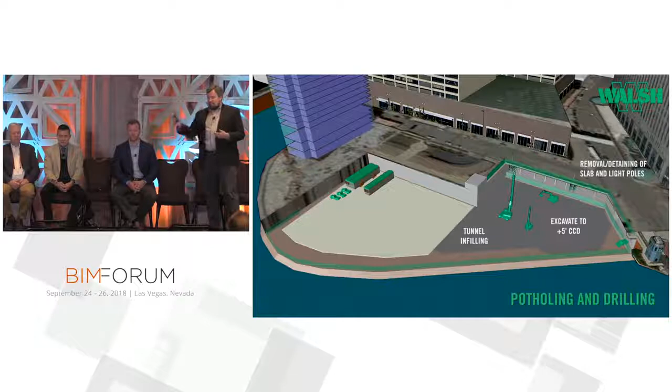The first problem we were trying to overcome was that the job site there in the gray area you see on the right, as soon as you start excavating, you've cut yourself off from the laydown area in beige on the left. So for our civil group, as they're trying to lay out the earth retention system, which because you're excavating 25 feet immediately adjacent to the full weight of the Chicago River, it's not a small feat of engineering.

But because they use bridges to build other bridges all the time, they said, don't worry about it, guys. We'll just bridge the excavation with this trestle bridge. We've got one of them in the yard right now. We can float it on a barge from the Chicago River, get to you at the end of the week if you need it. So they stepped up there.

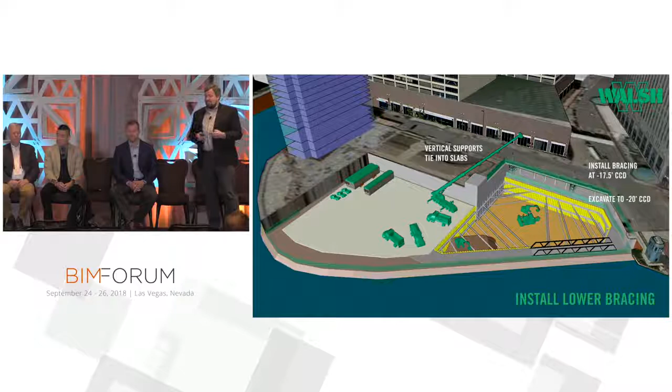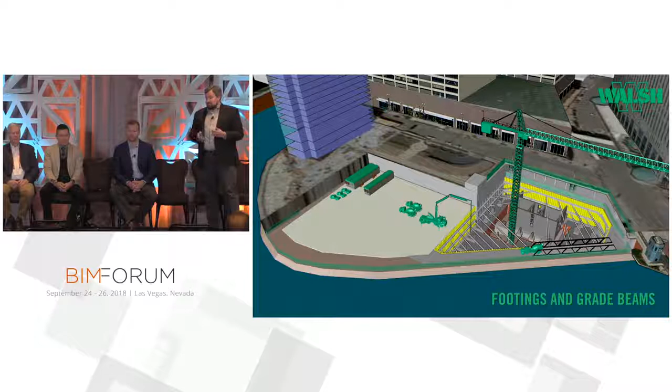Then our self-performed concrete operation came back, located the crane, identified the best place to tie into these new foundations as well, and then worked with the civil teams for plan locations for all these rakers, where they're going through the core and where they absolutely couldn't, as well as elevations of the system, because as the garage gets poured up, it replaces the bracing function of the steel members.

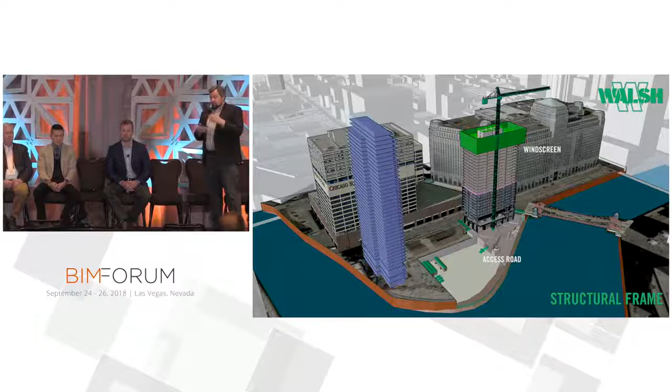And then after that, we're racing towards the sky, and this is where Dave's expertise as a project manager with high-rise comes to the fore, because he's talking to all the superintendents and project managers, putting together a master schedule and getting as much efficiency as we can out of that, because we're the high-rise group and this is what we do. And then after that point, the access to the laydown area is no longer a concern because you have a haul road going through the new garage, which will eventually serve the third parcel of land when it gets developed out, but right now it's just serving us.

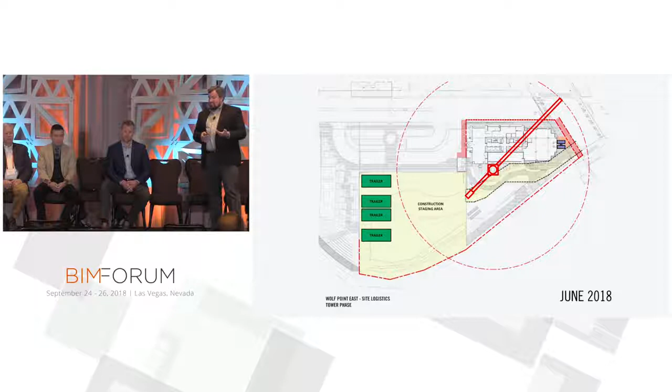So the first of the lessons learned that we were going to toss out to you was sort of a mistake we made in the project interview, where our superintendent did a wonderful job of walking everybody through those 4 slides as well as the 20 others that are part of that sequence. And then sort of as an aside, talked about, yeah, we could leave out the concrete lid and use that as a pick area for the crane. And the Hines technical experts were right there with us.

And it was a good conversation for a couple of minutes, but then one of the very important members of the financial experts on the team spoke up and said, I'm sorry, guys, I have no idea what we're talking about right now. So that was sort of a setback in that we spent 5 minutes of our 60-minute interview talking about the time of a concrete lid. But it was also sort of a validation for us that the BIM modeling was trying to communicate clearly our intentions to everyone in the room, not just the specialists.

So lesson learned, when we went to support materials for the Kennedy board meeting after getting through the Hines interview, it wasn't, Tom, can you produce 2D site logistics? Can you give us a 3D model? It's, Tom, can we do 4D? Which was wonderful for me because I didn't have to sell it. I didn't have to make a business case for it or beg to do it. It was just, Tom, can you do this? I said, yeah, okay. We sort of need it tomorrow. Okay, we can do that too.

And what we put together was just taking the model that Papa George had put together, marrying it up to the schedule that David put together, and then doing this very quick simulation of the project going up.

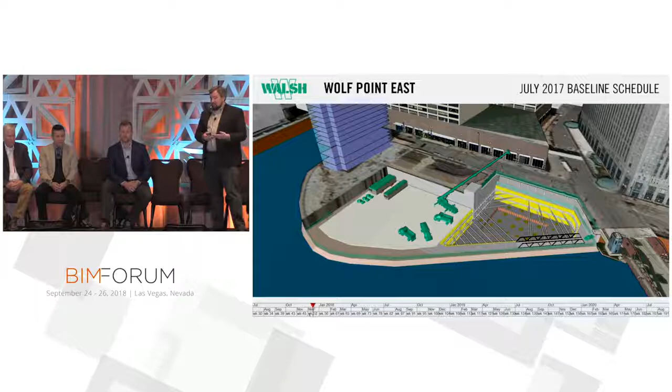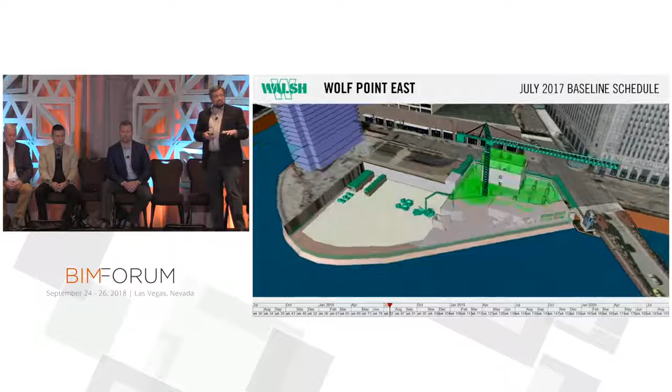And this was a win not just for the project, but also for the building group as well to make the case that this is useful. And now for all our pre-construction outreach, we do not just the plain Jane logistics model, but also that site entourage sequence that you saw, as well as the 4D validation model.

What you're seeing here is typical high-rise construction. Concrete cores are on a slip form. They're going up before the decks. The purple line you're seeing there is the curtain wall being installed after the shoring gets kicked out. Yellow is interior finishes. You've got MEP rough-in in between, of course.

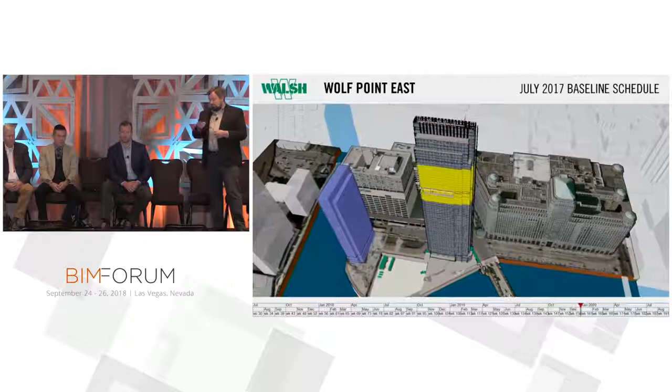And then the bottleneck is going to be that hoist on the right side where we can't turn over the units on level 4 until it's no longer needed on level 58. And then we're turning over units on the lower levels while still finishing the upper penthouse floors. And then if you're familiar with the geography of Chicago, that's Merchandise Mart there on the right.

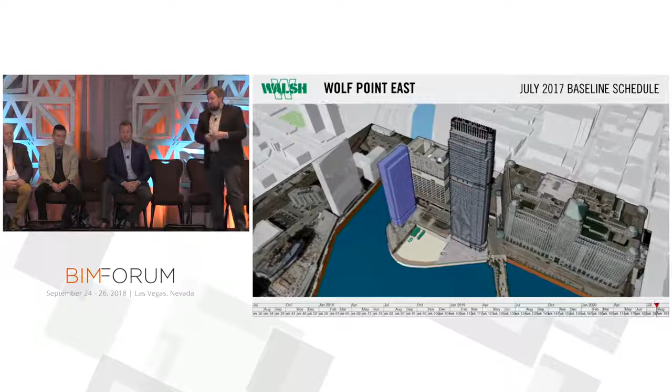So, like I said, we didn't get there overnight. We got some skepticism at first. This is the quote from my senior superintendent of concrete construction for that first meeting. But we just kept working. I was like, okay, what do I need to change to improve this? And it's like, well, you need to do this, that, and the other.

So I came back with a new image. He said, yeah, closer, but you're still not there. And then over a series of several days, we eventually got to a point where, yeah, I think that'll work. So that was a victory. We also left a lot of ideas out there on the cutting room floor as far as sequencing cranes, location of cranes. Do we build a dock on the Chicago River and have materials barged in?

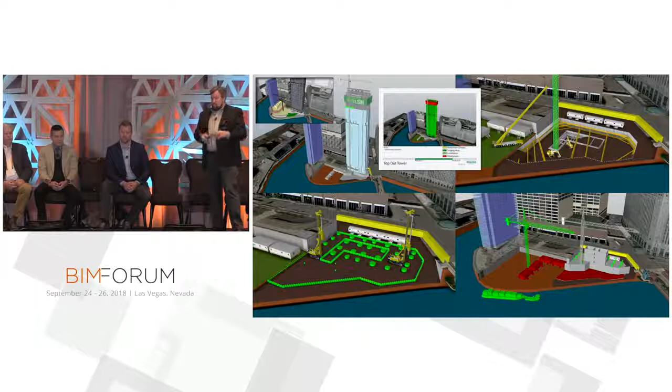And for me, because, as Ron mentioned, my initial training is as an architect, going back to the drawing board over and over again wasn't a new idea for me. But I think it did bother a lot of my project managers and superintendents because they're used to rework being a bad thing. And I said, no, this is how architects work. This is how we get to the good solution. We knock out all the bad solutions first.

So that was my contribution to the civil high-rise concrete expertise already in play. This idea that, okay, get everybody together, use drawings and models as visual confirmation, and then go through a period of rapid redraw. And that was a nice dash of design thinking because we were about to start collaborating with a design team that's not just an expert in high-rise construction, but also makes very smart, intelligent use of their models.

All right, so in order to be a great problem solver, you need to understand your constraints and your expectations. Now, Benjamin Crosby had a great presentation yesterday where he said, try not to use the word design intent, and use design requirements. The constraints are the design requirements, and the expectations are, I guess, the design intent.

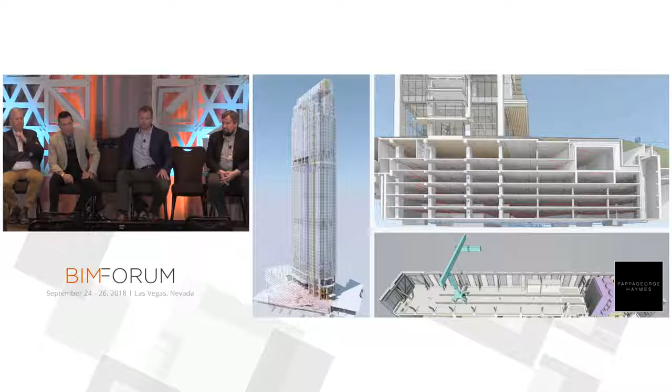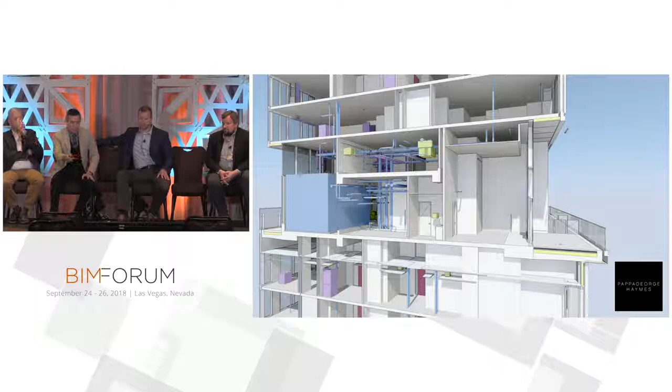Speaking about wind, RWDI did 3 studies for us: pedestrian wind study, cladding wind load study, and wind-induced structural responses. And all these provide information that helps determine different requirements with the cladding as well as pedestrian comfort on these terrace levels.

And one example would be, with the report, you determine what the uplift is on these terrace levels, and you take that to the landscape architect, and they would figure out the pavers that are available and the thicknesses needed to counter the uplift. So we get the structural engineer involved as well, and that helps us determine what type of pavers to use.

Moving down the tower to 3 and 3 mezzanine, we have an indoor pool. In the far right, you can sort of see the lift and slide doors that create a large opening, and sort of the same design considerations we have to consider. We have louvers which exhaust, so you need 15-foot separation between operable vents because these are living spaces. Again, we have outdoor terraces, and you sort of see in the bottom there's a 2-story lobby space with a fireplace, all requiring mechanical as well.

One thing I would like to mention is that before the general contractor gets involved, the architect is involved with over 30 different teams doing design meetings every week. So we are boots on the ground for almost a year before the general contractor gets involved. Weekly design meetings, intense, long-hour days, and the importance of the BIM manager.

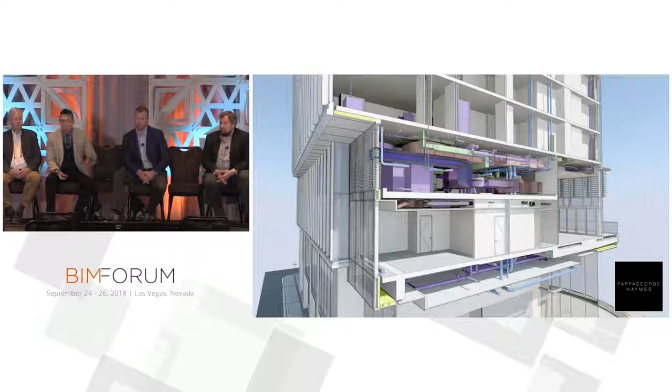And that's exactly the relationship it needs to be, because the BIM manager is so in-depth with modeling the systems and knowing really large clashes. And the project manager is the keeper of all information and design considerations with all these different 30-plus teams of designers, engineers, owner-developers, and consultants.

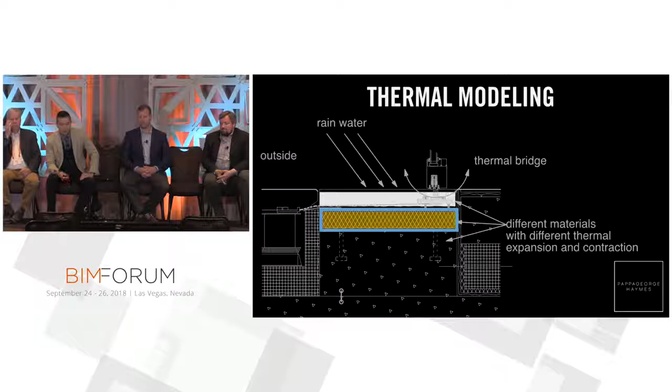One example that we were doing as well, just to get into the details, is thermal modeling. This is a section detail at the base of a panda door, and what we originally detailed was a long, skinny HSS, which was filled with insulation, sort of as a thermal break. But as Georgi had modeled this in our BIM software, we realized that this detail with the steel tube insulated, as compared to just having a simple concrete curb, there really wasn't that much of a thermal difference with energy escaping out of that detail.

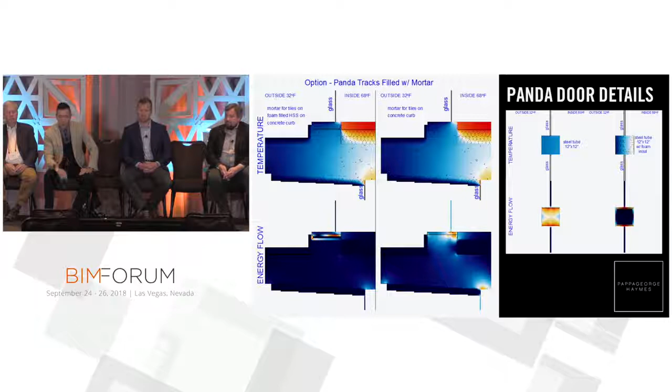So we decided to get rid of that complex, finicky detail of waterproofing and all that, and just keep it simple, have a concrete curb. The image on the right is really just a difference at the head condition at the lift and slide panda door. There's another HSS; the one on the bottom left is showing the energy loss if that was empty, and then the one on the right is filled with insulation, so you could totally see the difference there.

Residential high-rise considerations. So residential, you need to provide type A units, and they have to be sprinkled throughout the vertical distribution randomly in Chicago, which makes every floor unique. Now, on top of that, there's also the importance of interiors, because interior decisions have impacts on MEP.

Now, you'll see on the right corner, that's the tower, and there's 3 different colors, right? Initially, we had 3 different typical residential floor plans. The green is the lower typical floor, the red is the upper typical floor, and then we had penthouse units. There's 3 floors of that on top. The image right next to that in red is a section of the structural system.

So you could see that there's these outrigger walls, and then the outrigger walls go away, and then they come back mid-level, and then above that, where we have our upper tier, the columns turn into gravity columns, which have more flexibility with the units. So with the structural system in consideration, it creates another level of sub-typical residential floors.

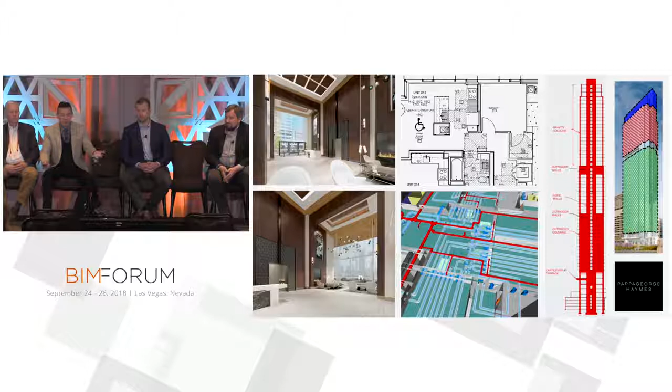You add into the mix the subcontractors' work with the plumbing distribution floors on 4, 8, 9, 18, 19, 28, 29, and 39. All of those RCPs are unique as well. So you've just created an entire 60-story tower of unique floors on every level, which gets to be pretty difficult to manage. So at this point, Ron's gone into what they call a 95% contract document set.

And this is how I was greeted when I first went over to the office. It was Adam Levy, who's actually one of the better project architects I've ever worked with, and he's got a great sense of humor. But the reason I was over there at the Sanctum was to do our kickoff meeting and to do the early outreach. Ostensibly, it's just about coordinate systems and file transfers and how are we going to manage data transfers.

But really, what we're trying to achieve, most importantly, with that first meeting, is to put aside this idea that architect and contractor are going to be adversaries, and it's not something that you can achieve just in that first day, but also to start on the working relationship, creating trust in one another's capabilities, mutual respect, and then sort of also Dave's gospel as far as managing expectations for how we're going to move forward.

Once you've got the working relationship down, I find that's really 50% of the work right there. The other 50%, of course, is all the technical mumbo jumbo that I get paid to do. What we're trying to do here is a data exchange map where we're explaining that each rectangle is a container for information, usually a file, and how we're going to move information from the design team on the left through the coordinators out to our distribution platforms on the right.

I don't really advocate for one software platform over another, but I do sort of advocate for planning. And what we had in this situation is that our building group is on an Autodesk stack, our civil group is on a Bentley stack, they're all on Windows. We're exchanging information with a design firm that's on a Mac operating system, as well as a Graphisoft stack. So lucky for us, they're used to exchanging models in generic formats with their design team already.

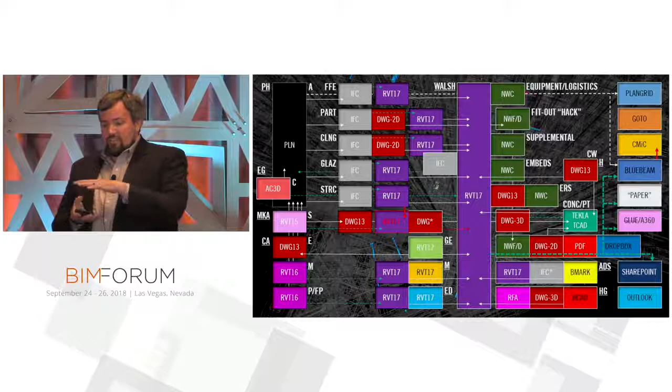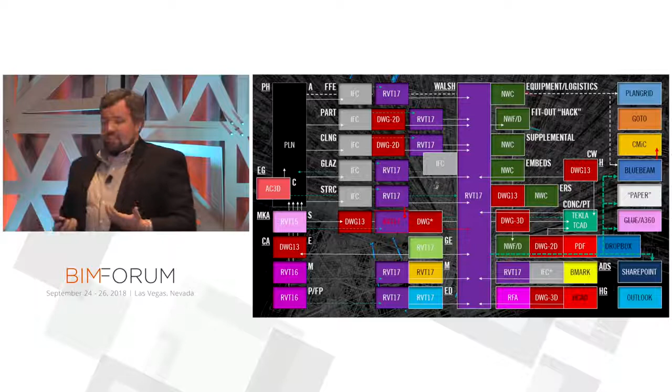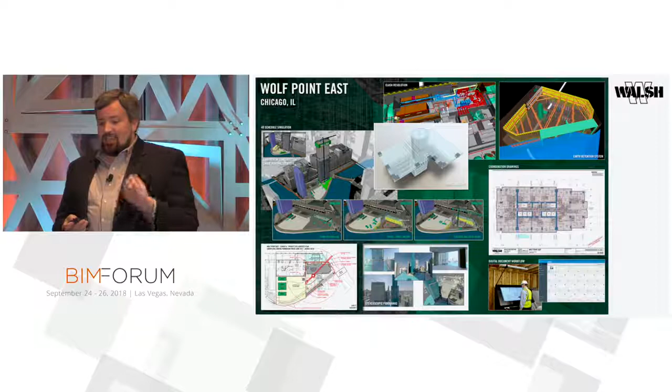So with all that set up, the people equation, the tool equation, the rest of all the fun stuff we like to do, VDC actually gets really easy. And when you forget about something, just because everything scales in a tower, it does become really difficult, like our sign-off models, which are tiny little Frankensteins, as Ron mentioned. And this is something we want to do differently on the next job we work together.

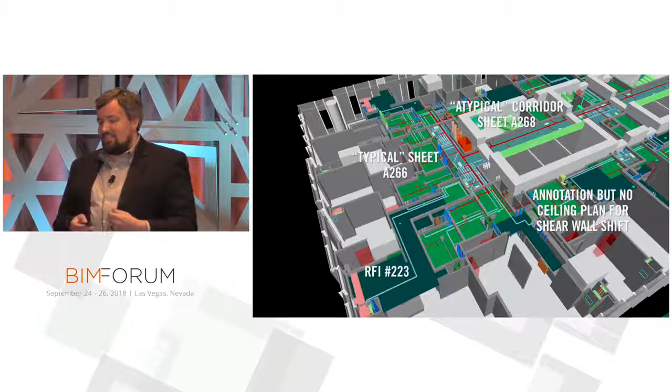They build out a typical ceiling plan, like the A266 sheet, which is the typical condition, and then you have local overrides on following sheets, like the plumbing distribution floors you're seeing here, which is going to be that teal section of ceiling that I had to selectively hide and then reinsert, as well as additional information from RFI 223, which added these soffits to conceal the lines as they go out. As well as stuff that only got marked up in annotation rather than the model, as far as these one-off little 2-foot soffit conditions. So it's something we definitely want to do better next time around.

As Marty said, our coordination meetings are sort of unique in that we've got the owner there in the trailer with us for 4 hours, and then Ron's also there on the web conference call, always available to us. So that creates an interesting meeting, because it's not just coordinators running through clashes. Sometimes it's an OAC meeting, talk about big picture, like, when is the design set for the interiors package coming through? And sometimes it's a design assist meeting, because we're being asked to comment on how a Riverwalk elevator works. So MEP is really stepping up to provide solutions and advice there.

So to support that sort of rapid decision-making, we had to change our meeting around, where we're playing a game called Let's Try and Crash Tom's Laptop, which is a game we win sometimes, which is fun for everyone. But just to be able to show this information to everyone, as well as Ron, who's out there on the moon, as we're trying to bring him into this conference call.

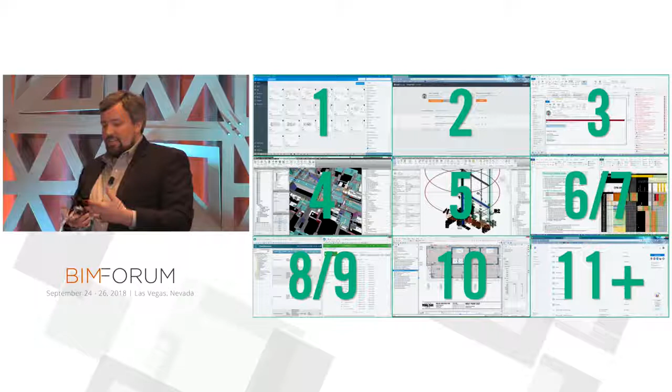I run it like an NFL broadcast, where camera 1 is our document management software, 2, we're broadcasting out to Ron, 3 is coming to the meeting prepared, marking up all your emails with flags and categories. 4 is clash detection software. 5 is content management if I need to take a dimension or draw something up on the fly. 6 and 7 is our agenda and schedule through Office documents. 8 and 9 is going to be the ASI and RFI and submittal databases we have online, the PDF reader, of course, and then the file sharing service.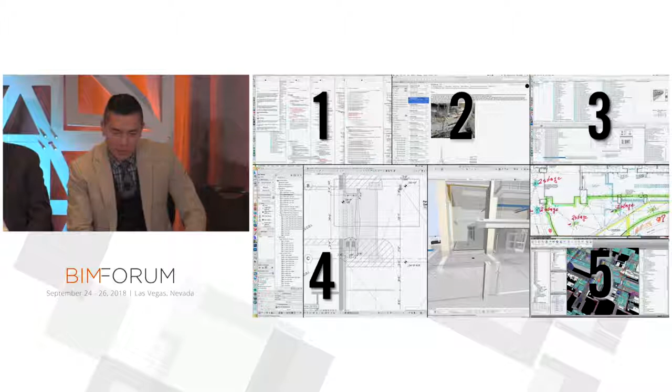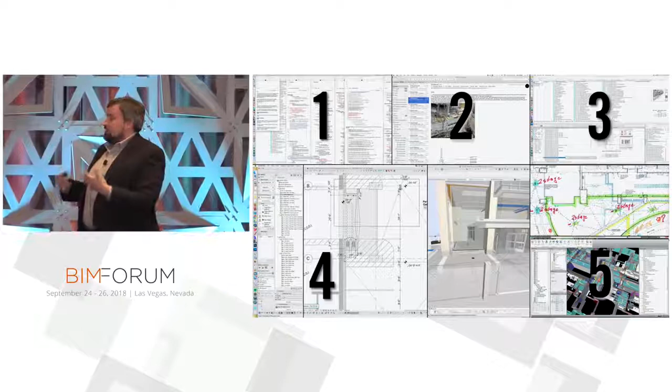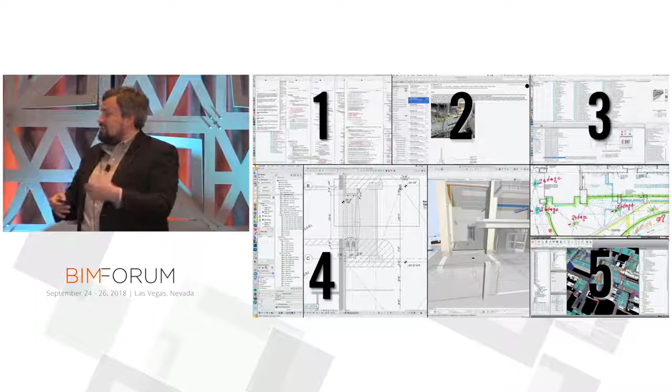And so the goal of that is not to drive ourselves crazy with 1,000 programs, but because we have all the key decision makers in the room together, we want to make a decision and stick by it and have all the relevant information available immediately to make that instantaneous decision. Most of our RFIs as a result are just confirming RFIs, where they start off as discussed in the BIM coordination meeting, please, yada, yada, yada.

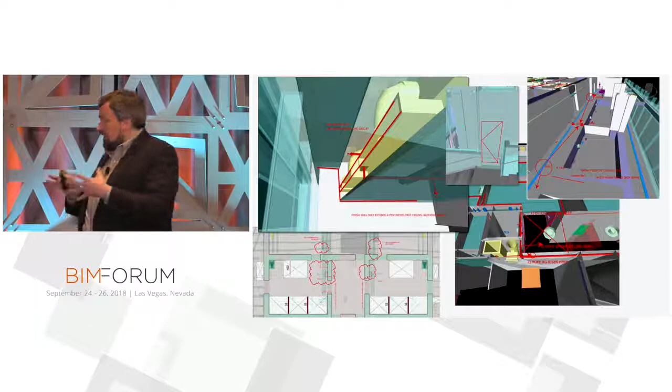Again, this is stuff that you do in any coordination meeting, but it gets ramped up when we've got Ron in a third location, which is constantly marking up for visual confirmation everything we're talking about, flagging things for follow-up as well. And just because as a high-rise group, Chicago's a great place for us to be, but I also have to support teams virtually in Sacramento or Des Moines or Dallas or wherever it is. So for us to be able to train ourselves in how to lead a meeting completely virtually, all these markups and the constant visual confirmation, whatever we're talking about on the screen, try to have an image that matches so that Ron can follow along, or whatever subcontractors couldn't make it to the trailer that day.

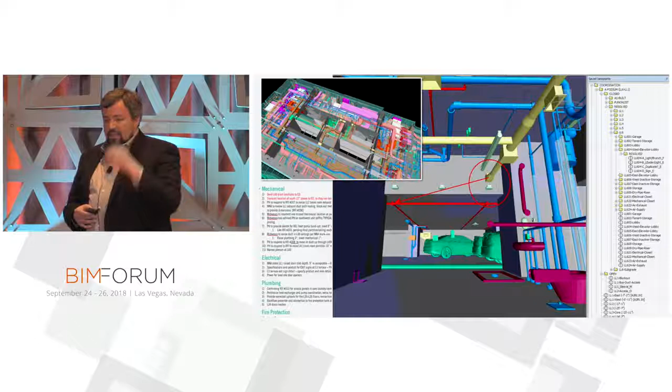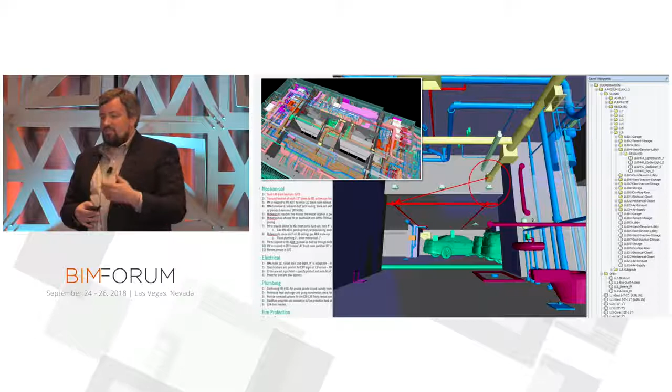Also, we organize the model in a way to quickly navigate from floor to floor. If we're talking about a problem with an exhaust duct going through structure, a light goes off about what we're doing on the 3rd floor mezzanine, we need to be able to navigate there in 5 seconds or less. You don't want to stand there waiting for me to navigate 20 seconds. And that's how we run our clash reports as well, level by level, room by room, in a location-based scheme rather than system versus system scheme.

And then that philosophy of just capturing everything and moving quickly between any issues extends to the meeting agenda, where just because Ron's a switchboard for a dozen consultants, I'm a switchboard for a dozen subcontractors, we exchange 100 or 200 emails every week. So how do you make sure that nothing gets dropped? And for me, it's just a simple tool like Word. There are better tools out there, but it's just this philosophy, both in the model and everything you do, to capture every discussion you have and quickly organize it.

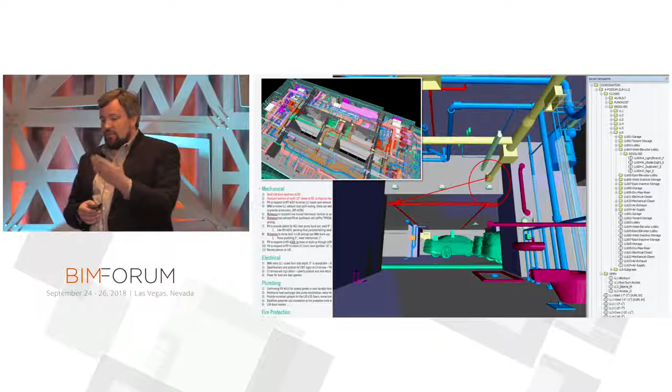And again, it's that repeat of that big table, all the stakeholders, visual confirmation, redrawing rapidly, which went on steroids when we got the PT guys involved, because these are 8-inch concrete slabs with post-tension steel cables running through them.

Looks innocent enough when you look at the dashed line in the structural drawings, but when you actually see the notes for the 14 tendons equally spaced, we realized we had a potential coordination issue. So we took this philosophy that would work for the coordination team and expanded out to the owner, architect, contractor coalition. We realized we needed to take the lead with an even bigger group of people.

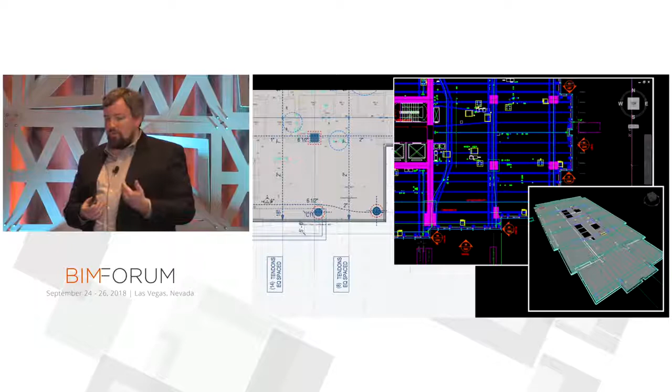Because of the design assist contract structure, we were months ahead of the PT guys, so our self-performed concrete team stepped up with a preliminary single line drawing of what they thought the layout would be. I converted it to a model. We used that to run clashes, and of course the slab lit up like a Christmas tree, but we started working through it by inviting the concrete team as well as our MEP guys, and everybody you see here on a tab on the right is someone who got involved at one point.

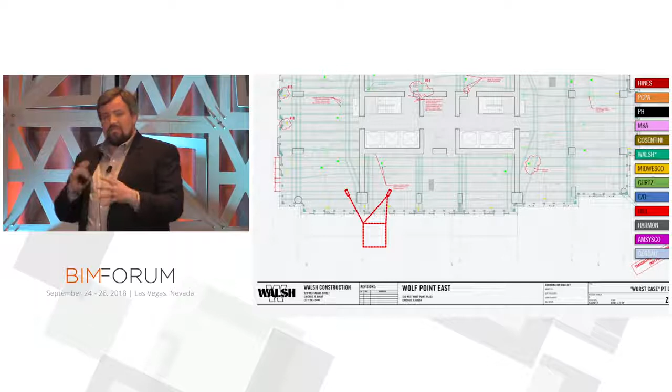Hines, because as much as our MEP guys are doing acrobatics inside the walls, eventually a partition did have to be moved. So Hines is involved because rentable square feet is changing. Design architect and architect of record are on board for design aesthetics as well as code issues with the ADA units. Engineers of record also contributing because we're changing their designs.

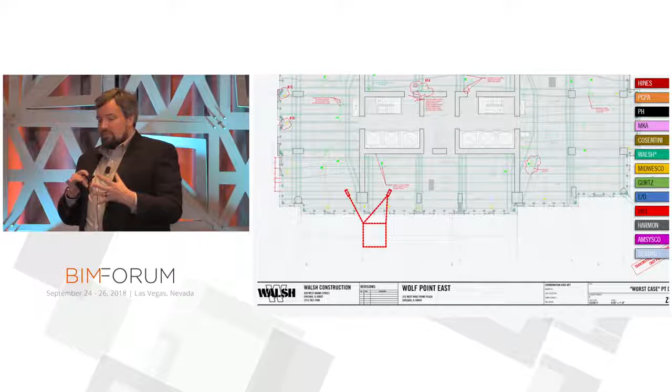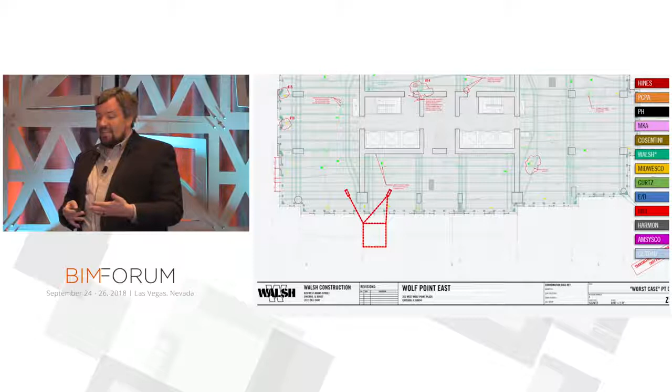And at the end, this is a quote from one of our foremen who managed the ironworkers for the actual PT work on the slab, because he'd very graciously come over to our trailer for the first 4 meetings, and the fifth meeting was to sign off. And he said, yeah, we can take care of all these 3 problems. Turned around to his assistant manager, and this was the quote I got, which is what I'm going to call a win for VDC, because he was very supportive of what we were doing, because when it comes time to actually construct this, and it's been raining for days, or maybe the Chicago River is frozen over, he wanted the comfort to know that we'd worked it all out before we went out there.

And that's really why I think Wolf Point has been great for the building group as a whole, because it's touched so many people, from pre-construction through coordinator, management positions, but also the field. And as a result, all of our projects after this, as we're trying to turn this big ship, have gotten a lot easier to carry through.

So with the coordination bit behind us, we want to end the presentation with a post-mortem, looking at things that we thought went well, things that we wanted to do differently next time, as well as stuff that we thought we should never, ever do again. And so I thought I'd cue this up with quoting you, Marty. This was a few months ago when we were walking to the office. I was afraid you were going to jinx the project. I think as the owner, you've got one of the more important opinions, and also Dave, you as an outside observer. So Marty, would you still stand by this a few months later? Still going well.

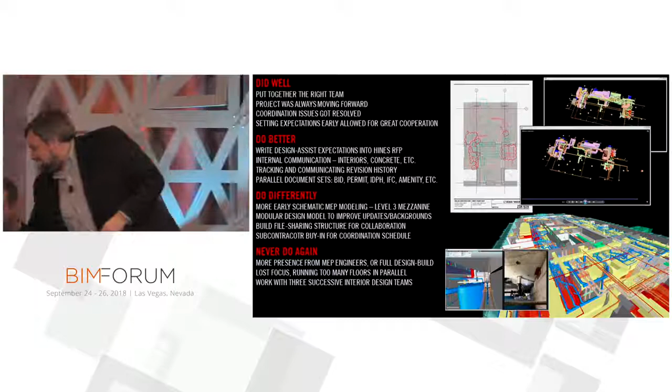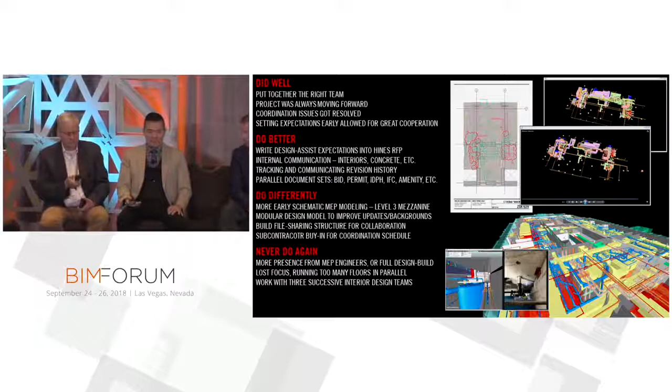What would you think went really well? Or anything you'd want to change later? Oh, yeah. Tom, we talked about this a lot, and I don't know if it's strictly luck or not, but we've got a heck of a team.

It started between owner and architect, and then once we got the GC on board, but then once we got into the coordination sessions, I'm actually quite surprised at the level of desire to do a fantastic job. I think the fire protection guys and the mechanical guys that we have working in the process that we're trying to accomplish here, they want to do such a great job, and I think that's a great benefit to this project. We've got the right people. I'm not sure how we got them.

Yeah. I also think that, it's kind of a repeat term we've heard, but setting expectations early, good planning. Tom's like a super planner. So he really kind of pushed us along initially, really got me up to speed at how these systems work, but really getting everyone on board excited for the job. I mean, it's one of the biggest projects in the country, and especially in Chicago. It's big time. So everyone was on board, everyone was excited, and just making sure you got the right guys and made sure they understand what the task at hand was.

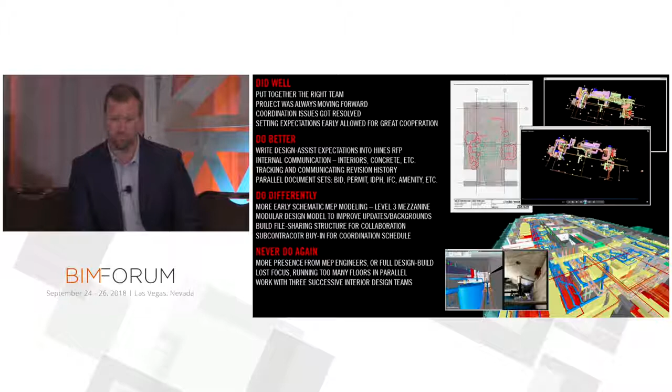For you, Ron, anything you'd do different? Did well. I would like to say that Tom, with his BIM coordination meetings, are incredible. He's so organized, and the agenda is just like rapid fire. Let's solve these problems right away.

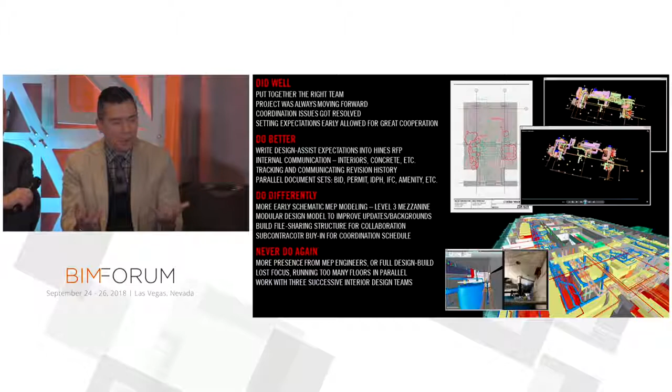It's really incredible. Do differently, I would definitely have some more accountability with this design assist approach, because the MEP engineers, what they delivered to the subs, there's just too many holes, and I give so much credit to the MEP FP subs that took on this challenge, because they were really given an incredible challenge that they've worked out, so they've done an incredible job.

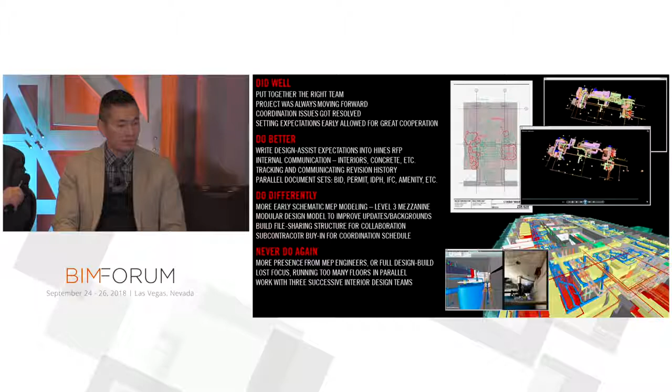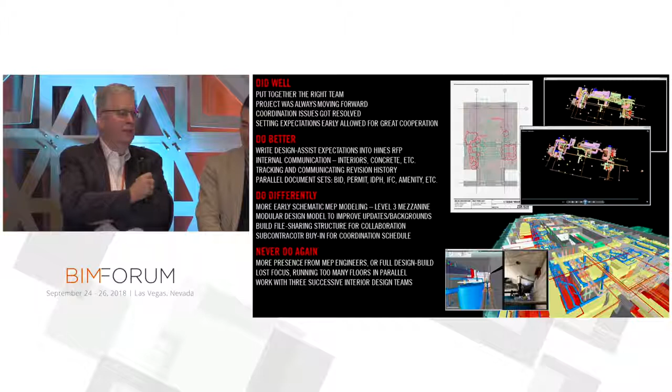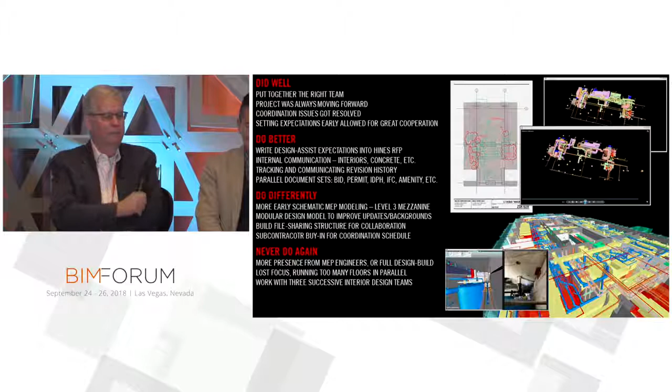I think that went back to Dave's comment about design assist, and maybe it wasn't defined well enough. We, as the owner, knew we wanted an engineer that was going to get us to a permit process so that we could get this project started, and that the subs were going to have to take it from there. It was just take it from where, how much am I changing, how much assist is there to the design assist process, and sometimes there was more than I think we expected. And so yes, I got to give them credit that I think we've worked together well with the subs, and sometimes it costs money and sometimes it doesn't, but it's going well. All right.

There hasn't been a lot of whining, complaining, or feel sorry for me on this job, even though a lot of times there might have been justification for it. Everybody shows up every day, knocks out problems one by one, and is worried not just about the success of their own company, but also the success of the project. And as much as you try to lead by example, I think we are incredibly fortunate with the way that attitude just grew up organically with everyone on the team.

And that's sort of why we wanted to bring it to BIMForum, because we wanted to show you something that we thought went really well. And if you're in a situation like us, where I think everybody on the stage would say we're sort of working for conservative companies with change, which are a mix of technology enthusiasts and technology skeptics, how do you start to change things and do a smart turn of that very large ship? We wanted to share a bunch of tools and techniques that we thought did work well on a project, and then help at least our building group do a lot better job on all the projects that followed.

And then also just sort of the general call to action for everybody else is also your thoughts on what you thought you saw here went well, what you think we should do differently, and what you think we should never, ever do again, because we would love to have your input and your feedback. That's why we're here. We don't want Wolf Point to be an isolated example of something really great we did. We want all our projects to be this good as we move forward.